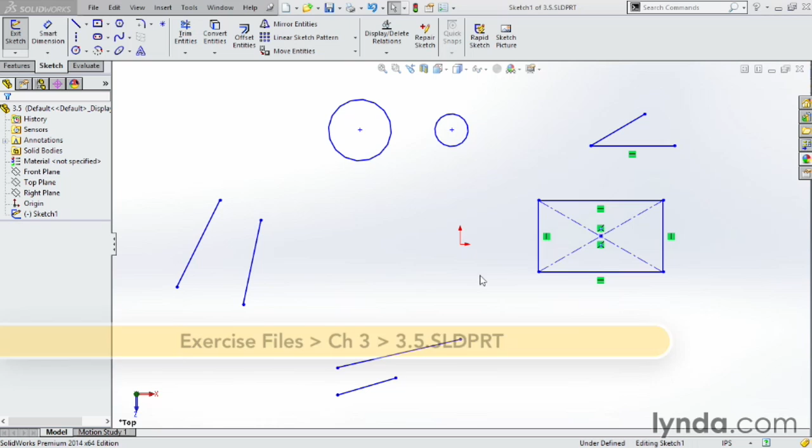Relationships and dimensions are what take simple sketch entities and define them into the design you're working on. Relations can control size, location, and equality between sketch elements, and dimensions can control angles, physical shape, and the distance between elements or the origin.

Let's take a look. I have a sketch open on the top plane, and I have a few different examples here laid out on the screen.

First things first, let's take a look at these two lines over here. If I click on the first line here, as soon as I let go of the left mouse button, I get a couple options, and notice these are context sensitive. I only have one line selected, so I only have two options: I can make it horizontal, or I can make it vertical. And then finally, I can make it fixed.

Fixed just means if I click on it, it can't move anywhere, it's just stuck where it is. So I don't normally want to use that one, so let's turn that off. Notice how I did that - how I deleted that. If you go back, just click on the green box and hit delete on your keyboard, or you can right click on the green box and choose delete from the menu.

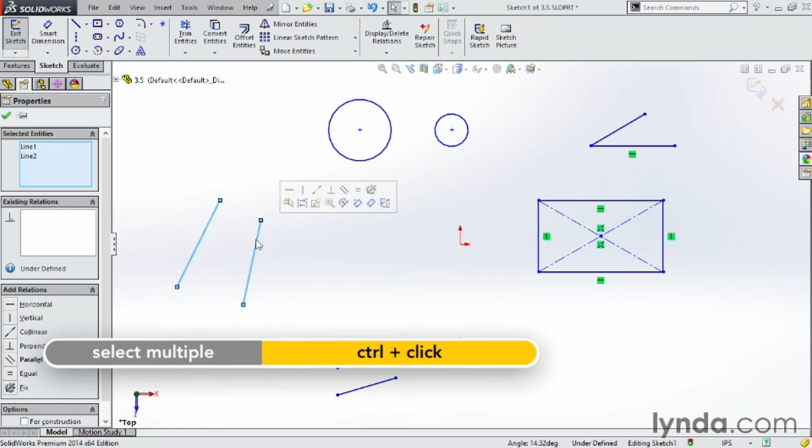Next, if I choose two lines - this line here, hold Control, select the next line next to it - I've got a lot more options. I can say these lines are horizontal, vertical, collinear, perpendicular, parallel, or equal. In this case, let's try parallel.

Wherever they are, they happen to be parallel, and if I grab one, I can move it around. Notice they operate as a team now. They're both parallel no matter where they are, and I can move things around. I can still change the length.

If I want to make them the same length, I could also add a secondary relationship. Choose both of the lines by holding Control, and I'll say equal. Now they're parallel and they're equal. Notice now they are still spinning around.

But what I can do is use that little fixed icon. Click on the tip - not the whole line itself, but one of the points on either end - and choose fixed. Now I have a fixed dimension. That point doesn't move, and this point here will move around, so it makes it so I can actually simulate some motion inside of my sketch and see how things actually work and lay out.

Down here, I can choose these lines, choose both of those lines. I can say these lines are, for instance, collinear, and it puts them on top of each other. I can drag it out, and you can still see the point here, and they can be separate lines or they can be on top of each other. As long as they're collinear, they all operate as a team, and there's this little dashed line showing that those two lines are collinear.

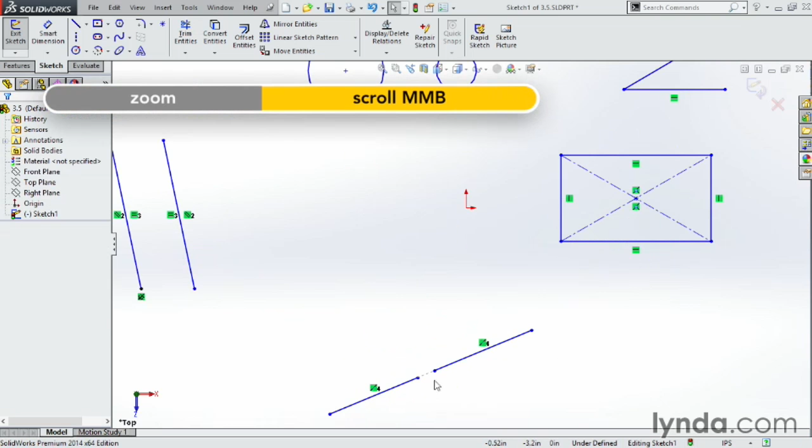In fact, you can even bring this point and drop it on top of that point there, and that adds a coincident relationship. Now those two points - it's two separate lines, but they're still connected together and in collinear fashion.

Up here, you've got a couple circles. Go ahead and choose both the circles by holding Control. As soon as I let go of those circles, I could say these circles are co-radial, or tangent to each other, or concentric. Let's try all three. First one, co-radial.

That just puts them exactly the same, one circle on top of the other, which is really not what we probably want to do in this case, but it does put the two circles exactly on top of each other. Hit undo to bring it back.

Choose them both again. This time I'm going to say these are tangent - that means they're touching each other. Now they can roll this thing around, and it maintains its tangency - it's a nice way to add the tangency. If you don't like it, you can always delete the tangency. Hit delete on your keyboard, take it off, now you can move it back away.

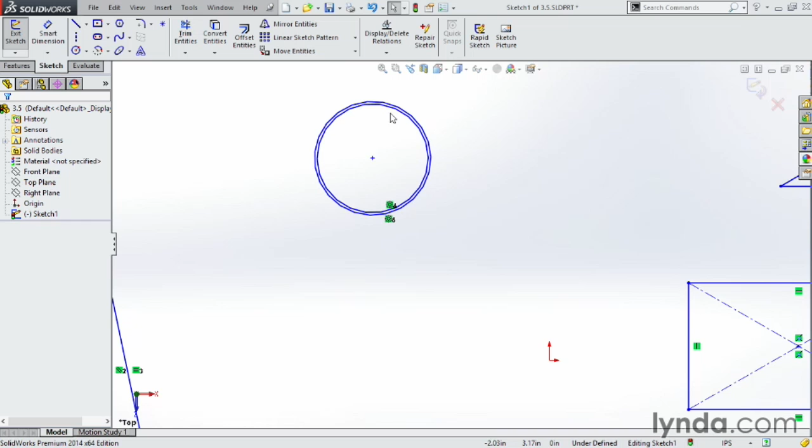Select them both again, this time choose concentric. Now you have one circle inside the other one, and wherever they move, they'll move as a team. You can adjust different things here.

When you have a couple circles like this and we add dimensions, you can add a dimension by choosing the inside circle and placing a dimension, maybe 1 inch. You can also dimension from the inside circle to the outside circle, maybe 1/4 inch. I'm adding those dimensions by clicking on the first circle, then choosing the second circle, and then finally choosing where I would like to place the dimension.

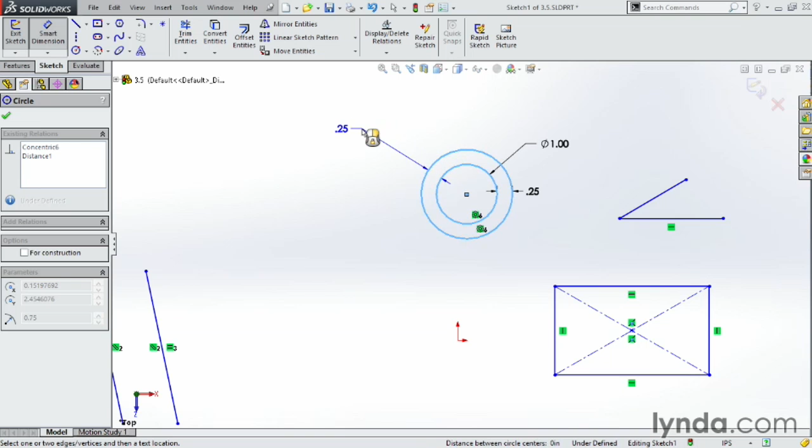Now notice I already have a dimension placed, so if I choose this one, it's going to say, hey, you're doing something wrong here. Notice everything turns yellow, and you're saying, hey, you've already placed a dimension on that sketch, and you've already defined it as 1/4 inch. Do you want to add it again? So it's asking you a question.

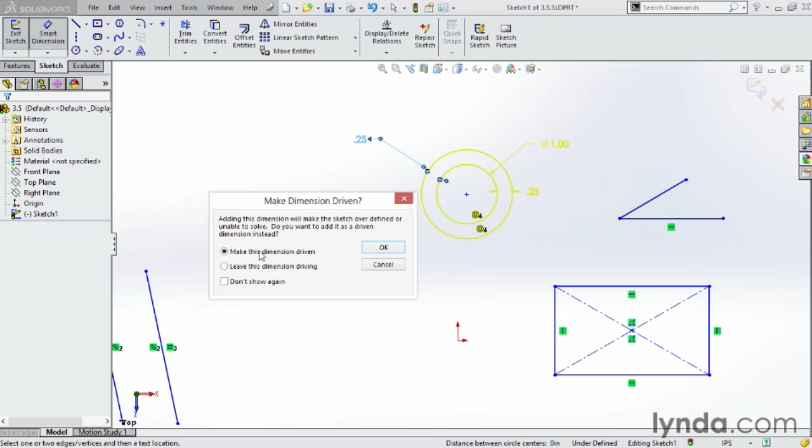Make this dimension driven. Driven just means it's just a reference dimension. It doesn't actually control the design. Or you can maintain a driving dimension, and it'll actually cause an error in the sketch. So if I make it driven, notice it turns gray, and the other one turns black. So if I change the dimension here, click on 0.375, it automatically updates as well, because it's just a reference dimension.

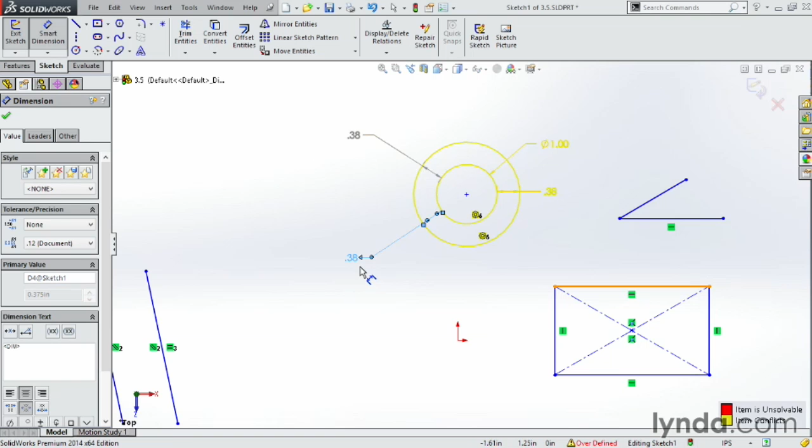However, if I were to go back and add a dimension from here to here, and I said, hey, I actually want to make this a driving dimension, click OK. Now what happens is this whole thing says it's unsolvable because it doesn't know, is it supposed to use this dimension here or this dimension here, because it's giving the same information by both of them. So what you can do is delete either one of them, and then it's back to being happy. Notice all the lines are still blue though, because they don't know where they are.

So to solve that problem, we either need to place this on the origin or add a relationship to where it is in space. One of the great ways to do that is using the centerline tool. So I'm going to make a line from here, and bring it right up to the top. Now wherever I drag this thing, I've got a couple lines that attach me to the origin. I can add a dimension by clicking on the line. I'll say 0.75, and over here, I'll say this is going to be 2.5. Notice as soon as I do that, everything turns black and it knows exactly where it is, because we always want to relate our sketches to the origin so they know where they are in space.

Continuing on, let's go ahead and grab the Smart Dimension tool. And here's an angle. I want to define the angle. To do that, you're just going to choose the first line, and then again, choose the second line. And then you're going to place the dimension. However, the Dimension tool is dependent upon where you place it in relationship to the angle. So over here, I've got 30 degrees, or 30.96 degrees.

As I move this around the circle, notice it's the same angle. It's just showing you how it would place a dimension differently. Same thing over here, same thing down here. So as you move around that circle, it keeps changing how it's going to place the dimension. In this case here, I just want to place it inside. I'm going to type in 30.

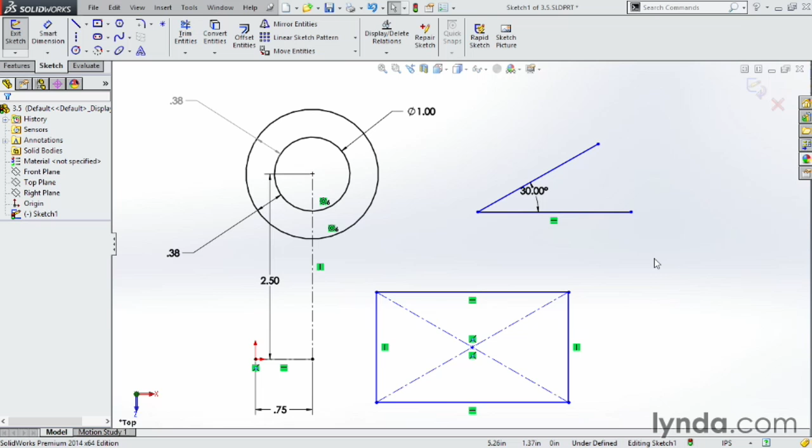Click OK and adjust the dimension. These lines can still move, but it is now defined as 30 degrees, so I can't change the angle. I can still just move things around. So again, I'd want to tie that into the origin or tie that into something else.

And finally, I've got this rectangle here, and I want to add a few dimensions to that. To do so, I'm going to go ahead and choose the dimensioning tool. There's a couple different ways to use the dimensioning tool. Number one, I could just choose a line itself and put a dimension, which is fine. However, what happens if this was not a full line? What if that line didn't continue the full length?

For instance, I'm going to give you a sneak preview here on the Sketch Fillet tool, and I'm going to fillet these corners. They're going to have a rounded corner to those 4 corners. Okay, I'm going to increase the size. Now, in this case here, if I use the Smart Dimension tool, it only dimensions that length. So I'll say 2.0, it's only dimensioned from here to here. It's not the full length of the shape. It's really not what I want.

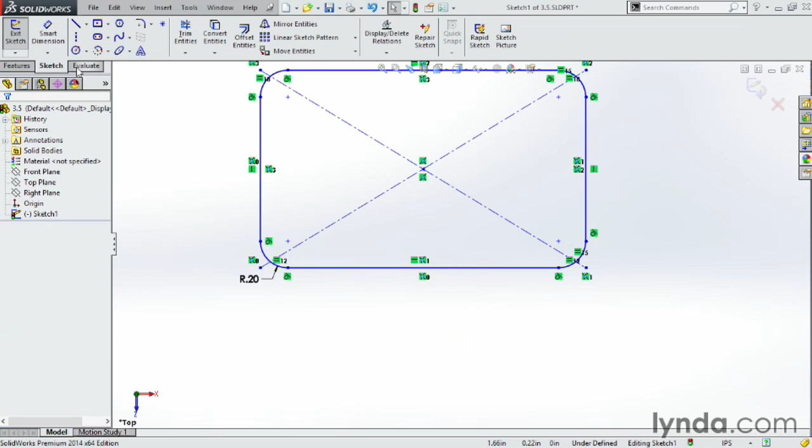So I'll go ahead and delete that, grab the dimensioning tool. This time I'm going to dimension from the left-hand side all the way over to the right-hand side. And then third, I'm going to place the dimension. That's called a 3-click dimension. I can type in 2.5 and place the dimension. I always try to use a 3-click dimension because it allows me to radius the corners and make other changes. It doesn't affect that final dimension.

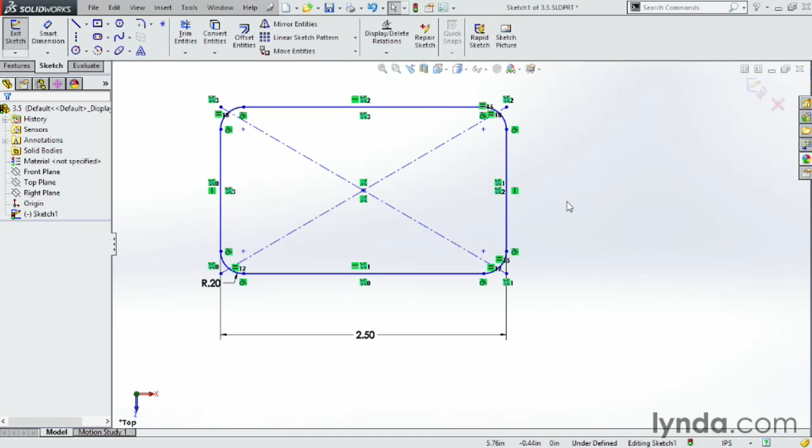Adding and using relations can be a huge time saver and makes your sketches easier to update and simpler to understand. Relationships and dimensions are used throughout SolidWorks, and an understanding of how they work is extremely important.